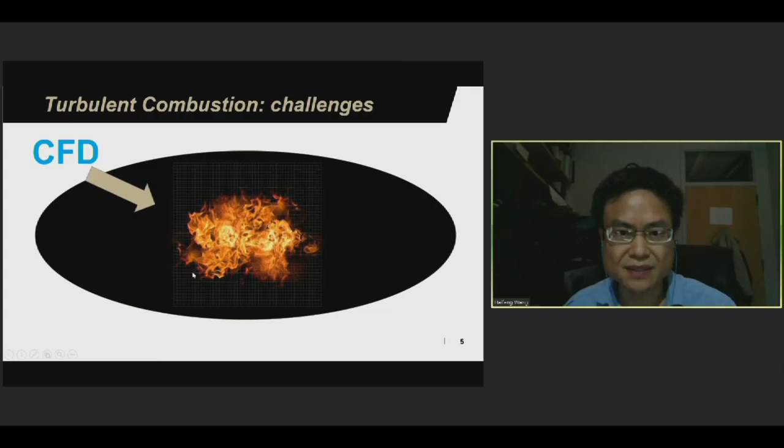So my research focus is really to develop models for turbulent combustion and how to use modern high-performance computers to predict this behavior. When we do simulations, typically we choose a mesh, then we discretize the governing equations for this problem, and we get a set of algebraic equations, and then we put that on a computer cluster and conduct the simulations. So this is the typical way we do this.

And for turbulent combustion, unfortunately, we found that in order to resolve all the details in a turbulence and combustion problem, we need to have a very, very small grid, and the grid resolution is denoted here as eta. That is sort of the smallest time scale and smallest length scale involved in this problem. And we know that this length scale is extremely small. So conceptually we can do this, but practically it turned out to be infeasible. The computational cost is just too expensive.

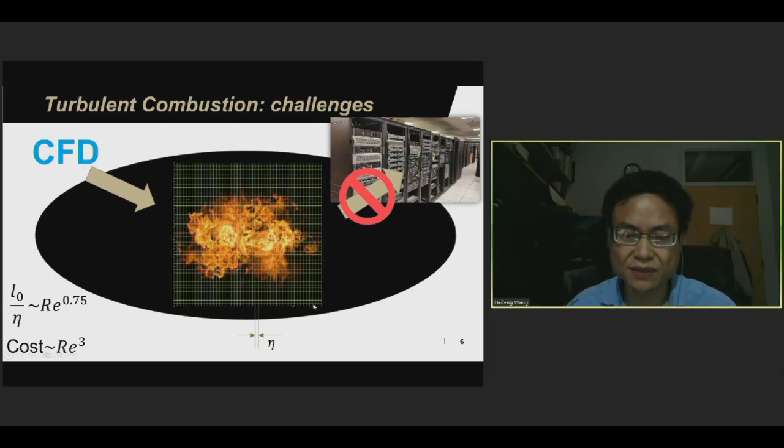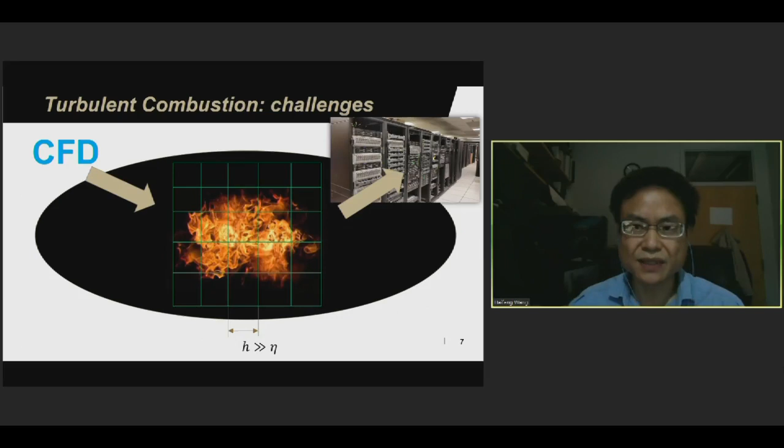Instead, a more practical or feasible picture is something like this. We have to use a relatively large grid to solve this problem. We can do that for practical devices, but in this case, the grid size that we have to use is much larger than the length scale needed to resolve all the scales. And then the question is, how do we construct the subgrid scale information? This information at the subgrid level is simply lost because we don't have the representation of that length scale by using the grid that we're using.

So this is just like you have a low resolution photo, and you want to reconstruct a high resolution photo, and that sounds like an impossible task, or at least a very, very difficult task. Unfortunately, a lot of the important physical processes like subgrid scale turbulence, molecular diffusion, and chemical reaction occur at the subgrid level. So to construct the information at the subgrid level for all these different physical processes, it is needed to provide a closure to the simulation that we need to conduct.

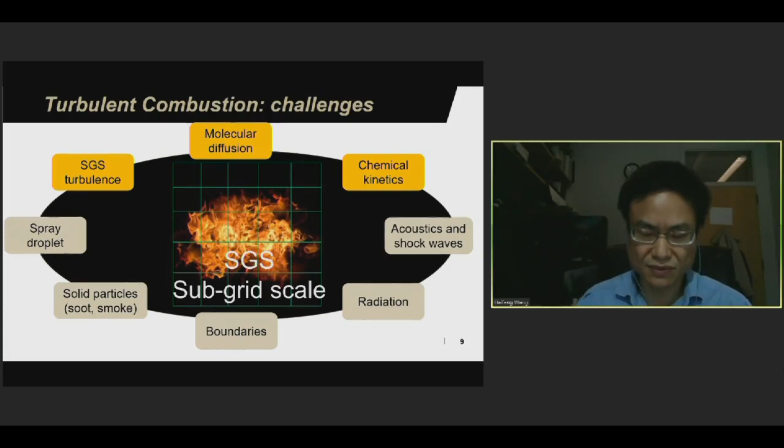And my area is mainly focusing on small-scale turbulence, molecular diffusion, chemical kinetics, how to reconstruct this information, and the coupling between these different physics. All right, so next I'm going to use a few examples to quickly illustrate the kind of work that we have been doing. The first example is to think about differential diffusion in this so-called flamelet model. Differential diffusion is a phenomenon that is widely observed simply because different scalars in combustion have different diffusivities.

So this causes this so-called differential diffusion. In traditional combustion models, for a good reason, we have to introduce an equal diffusion assumption. And that is needed to construct some of the models. One example is this so-called flamelet model. To construct that model, we have to introduce the equal diffusion assumption. And we have been using that for like 30, 40 years.

And nowadays, when we think about combustion, obviously molecular diffusion is a very, very important process. So the question is, how do we incorporate differential diffusion in our modeling? So recently we invented this series of new models. We call them LDD, NDD, or NDDV models. And the idea is to try to incorporate differential diffusion in the flamelet model.

So here, just a quick example to illustrate how these models work. This is a very simple mixing layer test case in box turbulence. And here, Z is a parameter we use to quantify the differential diffusion effect. These circles, you can think of these as an exact solution for this highly simplified problem. So the new models work pretty well. We are very close to the exact solution.

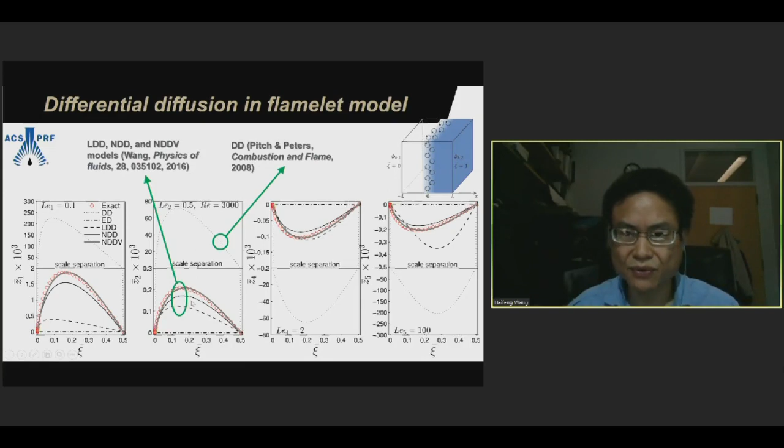And this is just for comparison. This is a traditional model. And you will see that this model over-predicts the differential diffusion by at least one order of magnitude. So you can see that this is a very important progress we made in terms of how to incorporate differential diffusion.

So this is another example. In this approach, called the transported PDF particle method, which is a very sophisticated modeling approach for turbulent combustion, basically we're using a lot of particles to mimic the combustion process. And all these particles evolve stochastically in the physical space and scalar space, so that we can mimic the evolution of the PDF in this problem.

For treating the molecular diffusion, we actually have a similar story. Traditionally, we have to assume equal diffusion. So this random walk model is basically an equal molecular diffusion model. And then in 2007, 2008, a new model was invented to try to incorporate differential diffusion. But unfortunately, all these models turn out to be not convergent, in the sense that when the number of particles goes to infinity, the error does not go to zero. So it's inconsistent and non-convergent.

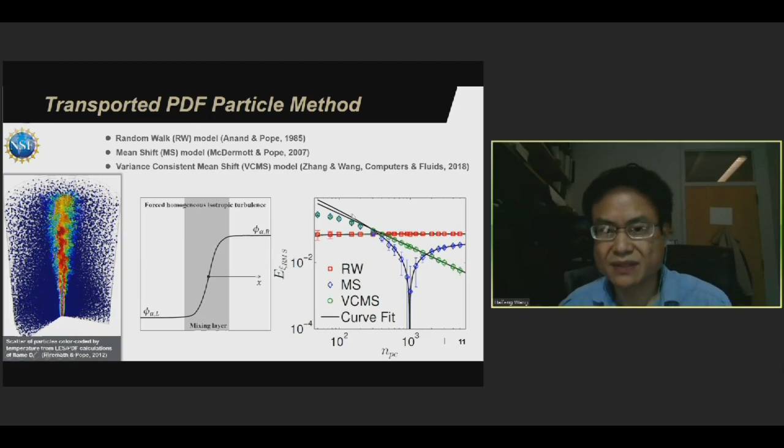You can see that this is a random walk model, a traditional model, and this blue color is another model called the mean shift model. The y-axis is the prediction error, and the x-axis is the number of particles. Theoretically, when the number of particles goes to infinity, the error should go to zero. But in this case, neither the red model nor the blue model is convergent. And then we invented this so-called VCMS model. Basically, we achieved this nice convergent behavior.

And this is another example dealing with a slightly different approach called the Eulerian Monte Carlo fields method. It has a similar story: some of the models are not consistent, and then we try to achieve that consistency. And I will just skip this and go to the next example.

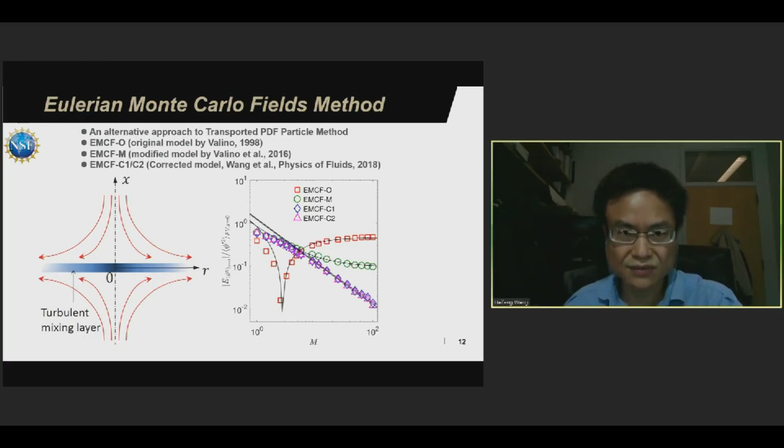In this example, we are dealing with the modeling of mixing in turbulent premixed combustion. Mixing is extremely important in turbulent combustion. It determines how fast different species mix, and combustion can only occur when all the species or scalars mix together. So mixing is a very, very important process. And in order to model mixing, we did some very detailed, lengthy analysis.

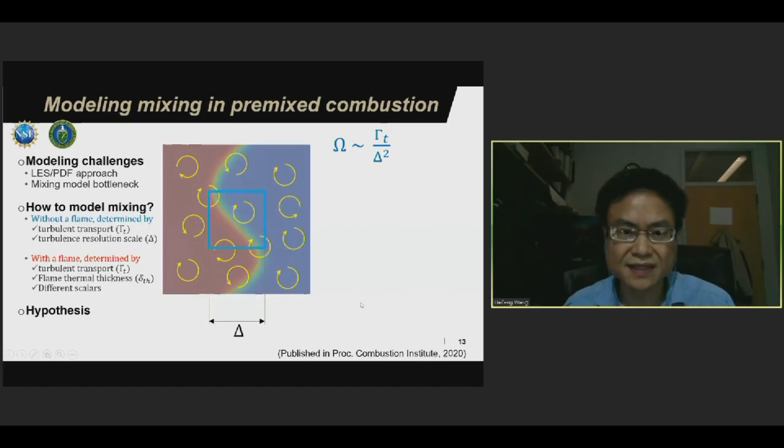We found that if we can validate a hypothesis like this, we will be able to develop a very good mixing model. So the hypothesis is like this. A factor called the scaling factor F, if it is a power law like this, in which delta is the grid size and delta TH is the flame thickness. If this F factor is a power law, then we know that we can develop a very good mixing model. So it is very important to test this hypothesis.

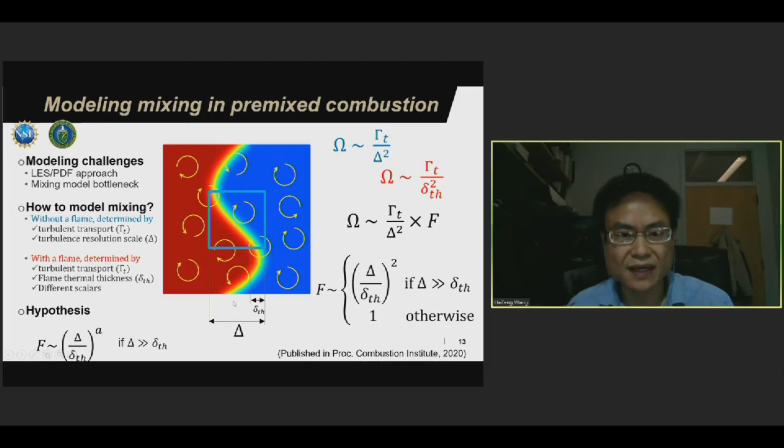So then we tested this hypothesis using a DNS flame that we obtained from Sandia National Lab. We formulated the different quantities and tested the hypothesis. And indeed, it turned out that this hypothesis is true, as indicated here: the F factor against delta divided by delta TH. We found that if this number is not very small, we indeed observe a very remarkable power law scaling on this log scale. It shows as a straight line. So that strongly supports the hypothesis that we formed. And based on that hypothesis, we can build a model that has a very, very strong theoretical basis.

So the model we built is something like this. It looks very simple, in which A and B, these are the model parameters. We calibrated these model parameters based on the DNS data. And then we published this work recently. And after we published this work, we looked at this model. We found that this model actually didn't work very well. And one important reason is because we found that these calibrated model parameters A and B are not good enough.

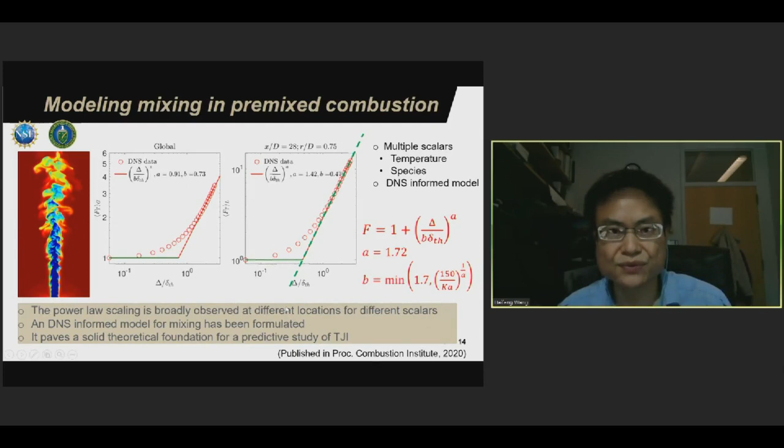And then the question is, how do we further enhance this model? So the idea we had is to use machine learning to construct better models for A and B, these model parameters. And indeed, that was a very, very good choice. And just to illustrate the performance, look at this subplot. You'll see that these circles are essentially the DNS data. You can think of these as the true solution.

So the green line is actually the model we developed earlier with the calibrated A and B. The model actually didn't work very well. And later we used the machine learning model, which is the red line. You will see that this red line agrees with the DNS data very, very well. So that shows that this machine learning model can enhance this physical model very, very well.

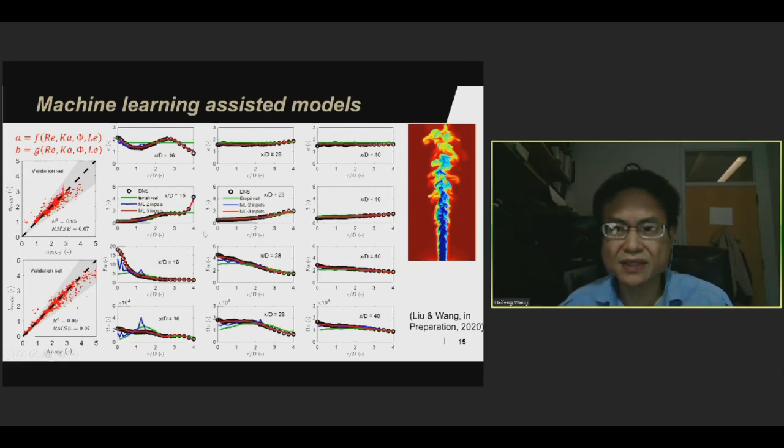So machine learning actually is a new direction that we have identified to help enhance the model development. And currently, we have quite a few efforts in different aspects to utilize machine learning for model development. So these are just quick examples: developing wall models for hypersonic boundary layers, and developing a convective heat transfer model for a wall fire. And this is a collaboration with an insurance company.

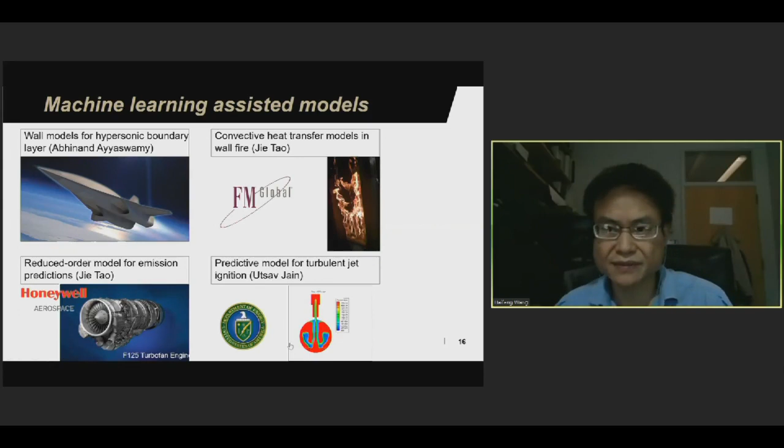And this is to develop a reduced order model for emission predictions. And this work is a collaboration with Honeywell. And this is a DOE project in which we will use machine learning to enhance the model for the prediction of so-called turbulent jet ignition. So these are just examples, and all this work involves machine learning. I think I'm running out of time, so I need to go a little bit quickly.

So moving forward, we will still focus on turbulent combustion and further enhance the models we're developing. We will strongly rely on physics-based approaches, but at the same time, we're going to follow ideas from data-driven machine learning for the further enhancement of the models.

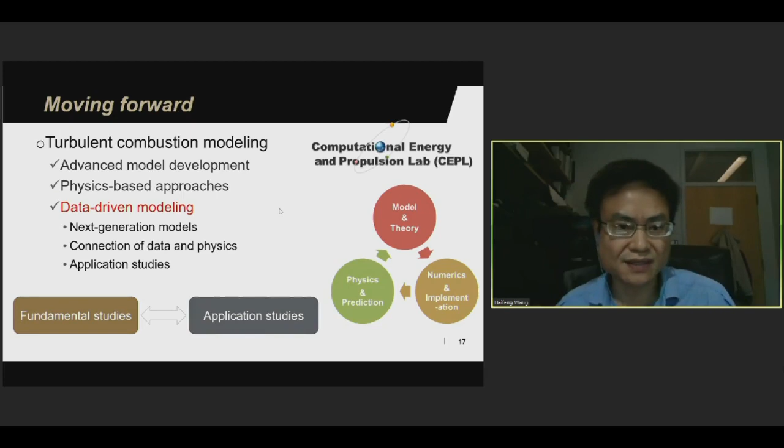And in terms of teaching and service, I'm teaching two courses currently. One is the undergrad level course, thermal sciences, as Bill mentioned, and the other is my grad level course, turbulent combustion modeling. Next semester, I'm going to teach a new course called computational combustion. It is sort of a modified 1690 to make it a little bit easier so that it is more accessible to many students. The idea is that I hope we can use this course to help build computational skills for our undergrad students before they go to the job market.

And in terms of service, I'm very grateful to my department head and a lot of senior faculty in the department for giving me feedback and suggestions on how to enhance the service level, which is important as a tenured faculty. So with that, I will stop here and thank you very much for your attention.